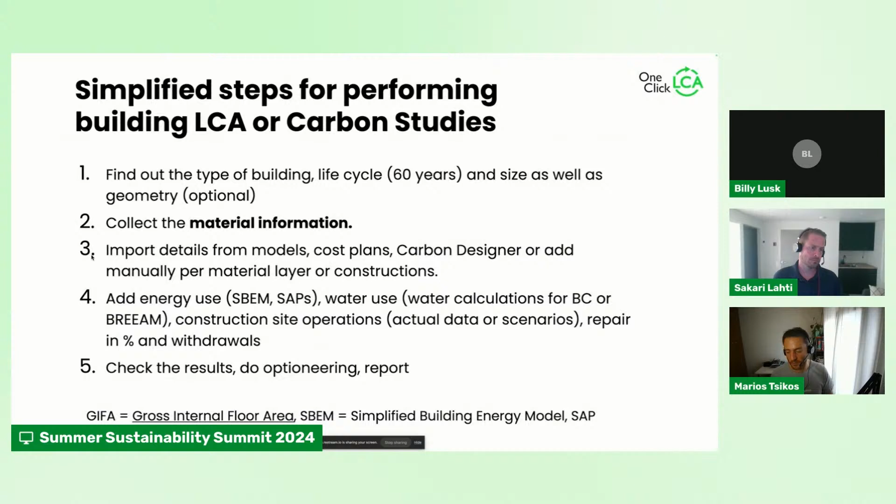And when should someone start this process then? The answer to that question is very simple. It is as soon as possible, because it is at the earliest stages that we've got the higher ability to influence the design. It is at the earliest stages, for example, that we can convince the design team and the client that we need to switch from one structural frame to the other, or we need to change the shape so it is more efficient, or do any other such big change. And as we move on, we leave smaller changes like window types, flooring, and choosing products for later design stages.

Sources of data can be quite many, really, but today we will focus on data sources for structural materials, in which case the One Click LCA integrations with Tekla Structures and Tekla Structural Designer can be very useful. And with that, I will hand it over to Sakari, who will talk a bit about these integrations and how Trimble's tools have been proven very useful for prefabricators as well, who wish to produce EPDs for their products. Sakari, over to you.

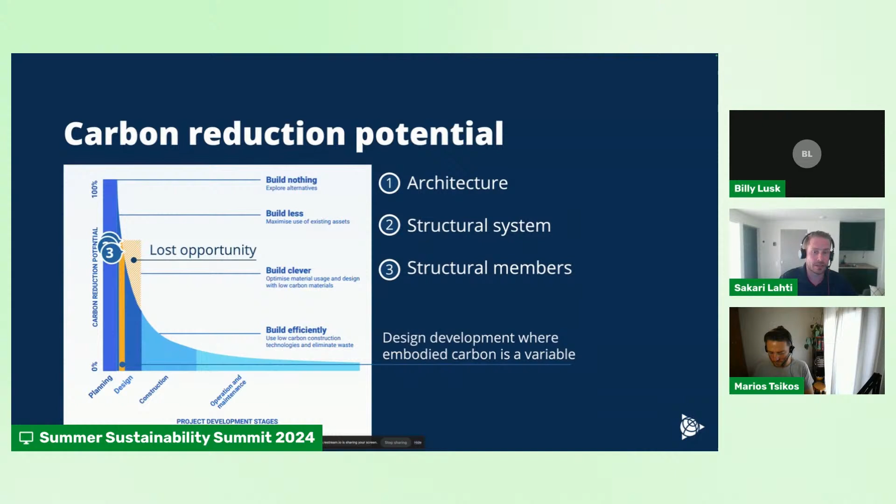The more iterations you can run against different value parameters, the more insights you will have to make better decisions. This type of design development will, of course, need a new transformational attitude from all the stakeholders: owners, contractors, manufacturers, and of course, the entire design team. But when optimizing the entire building-level embodied carbon, the data integration to LCA software needs to be fluent, but also feed the correct data.

And with Trimble, there are three different use cases for how to feed One Click LCA with data. The first option is directly from the structural analysis software, which is called Tekla Structural Designer from Trimble. The second option is from our constructible BIM modeling software, Tekla Structures. And the last option is our project collaboration platform called Trimble Connect. These options provide feasible data transfer regardless of the project setup.

After data is imported to One Click LCA, you can get the building LCA that can be used as a benchmark to reduce the embodied carbon with the project stakeholders by changing the design or the construction materials. So all of that is happening on the building-level optimization.

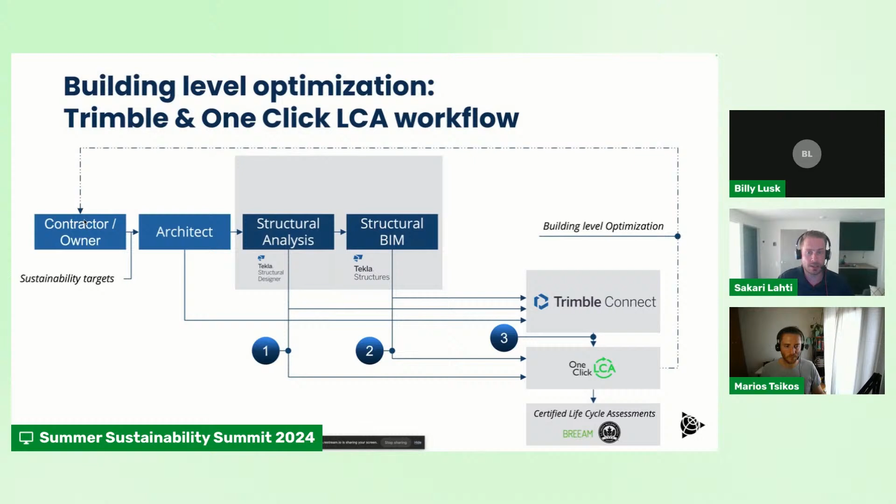But then inside, each designer of the project can optimize their own design within the building optimization. With Trimble, we offer tools for Tekla Structural Designer and Tekla Structures to dynamically see the embodied carbon of individual structures. The user can define or download embodied carbon factors or EPDs used in the calculation. The idea is that the structural engineer would get a basic understanding of their design choices related to material selection and the structural system's impact on the material quantities, and of course the embodied carbon quantities.

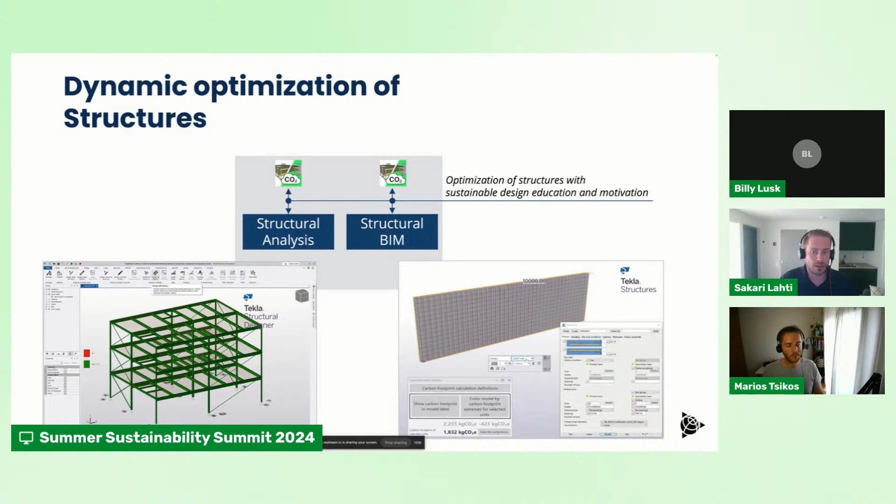You can find more information about these tools on the Tekla website if you want to learn more. There are a few webinars regarding those.

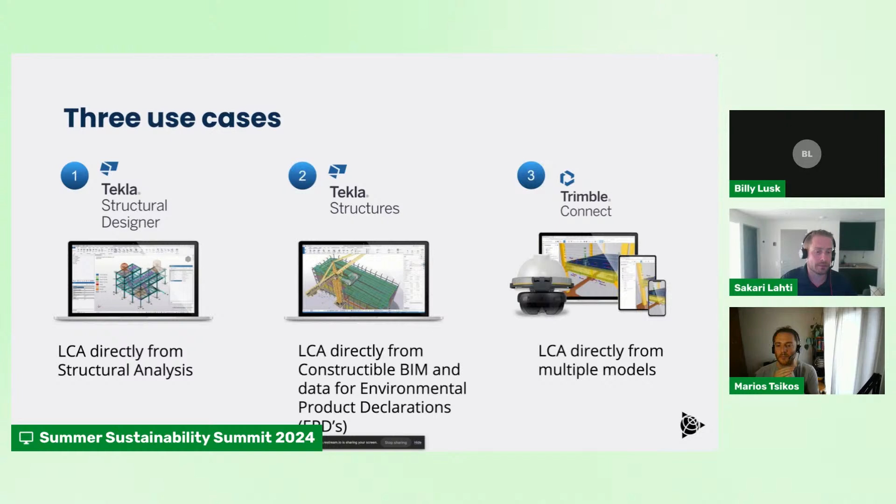But then back to these use cases with One Click LCA. So, three different scenarios. In the first one, a structural engineer uses Tekla Structural Designer for structural analysis and exports the data for the LCA. In the second one, a structural engineer or BIM technician uses Tekla Structures to create a structural BIM model and exports the data to One Click LCA to do the actual life cycle assessment. And the last one is where an LCA expert might use Trimble Connect to gather data from multiple different sources, combining multiple different models, again to send the data to One Click LCA.

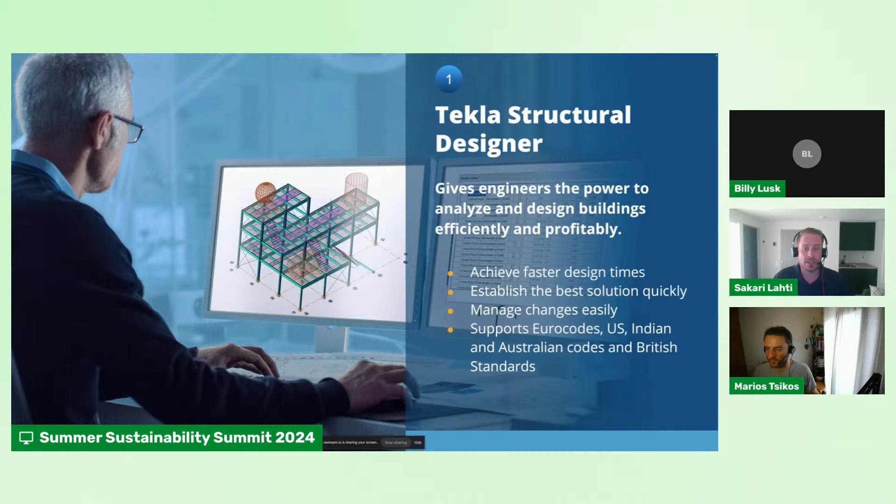So the first use case is with Tekla Structural Designer, the easiest to learn structural analysis and design software for steel, concrete, and timber. It supports Eurocode, US, Indian, Australian, and British standards. In the next slide, you will see how easy it is to submit the structural analysis level material takeoff to One Click LCA. After structural design of the members has been done, you'll find the One Click LCA button on the Integrations tab. It exports the material takeoff to One Click LCA and opens a web browser to continue with the data. Notice at this point, it is possible to send the data to another user.

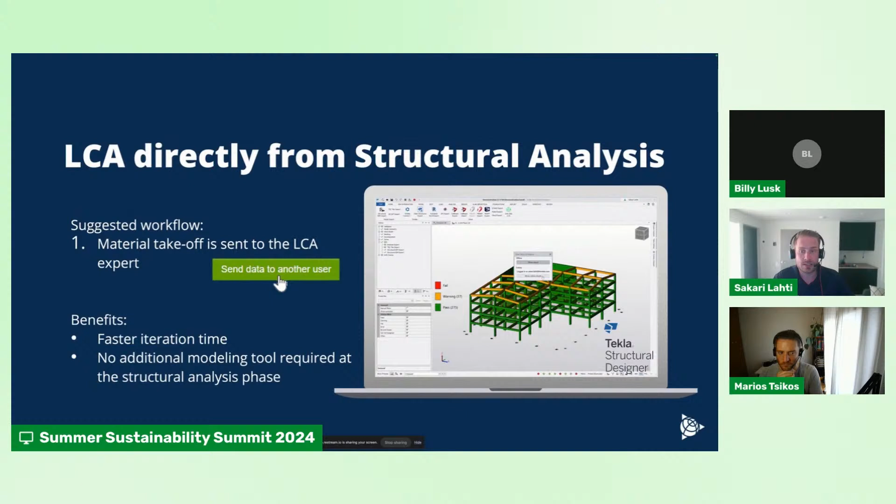So it doesn't need to be the actual structural engineer utilizing One Click LCA; the data can be sent for the assessment done by another user. This speeds up the iteration of building design, as the structural model is utilized before any official documentation is needed.

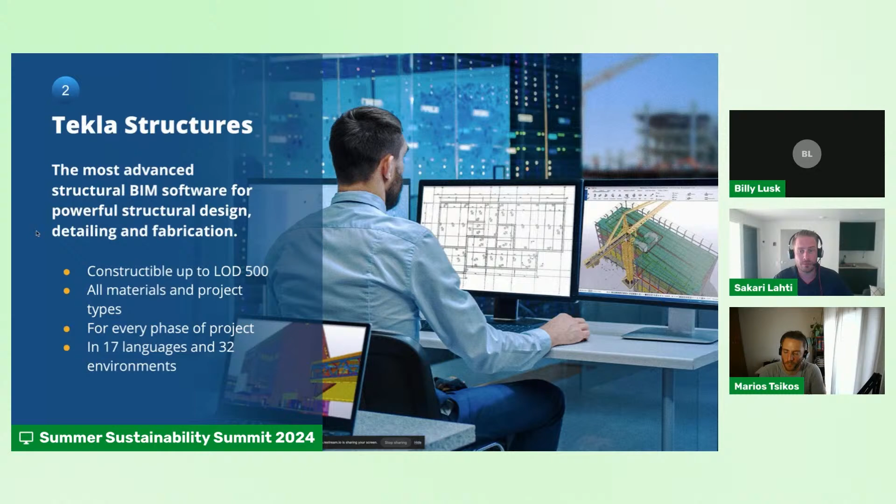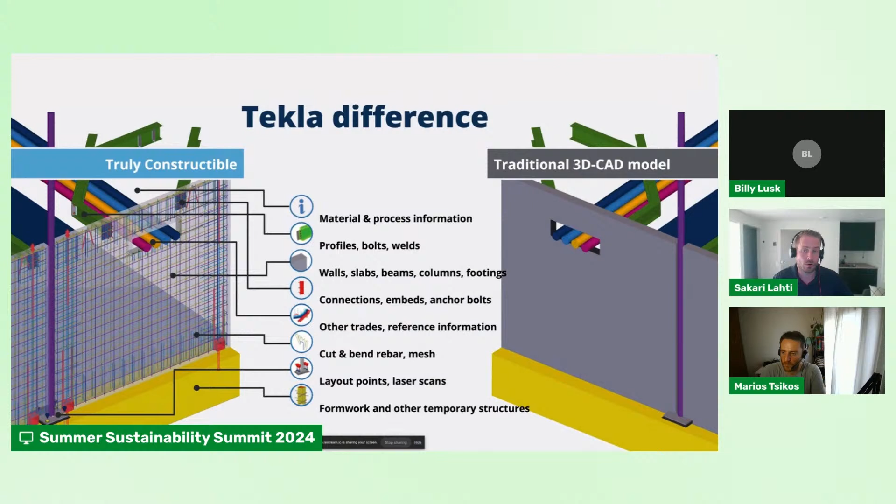Then the second use case is with Tekla Structures. Tekla Structures is a powerful structural BIM software that lets you create, combine, manage, and share multi-material 3D models packed with valuable construction information. You can use Tekla Structures for any project type, any material, throughout the project, from conceptual design to the constructible level of detail. The key difference is that Tekla Structures has been built for constructible BIM modeling. It means that every nut, bolt, weld, connector, or rebar can be easily designed.

Here's one practical example of the difference that is important from the LCA point of view. A Tekla 3D model really represents how the structure will be built. Therefore, the material quantities are always correct, and it does not contain any overlapping materials. In the example structure here, there is a 4% difference in volume of concrete compared to alternative BIM software. Inaccuracies in the data input for the LCA can distort the results, leading to bad decisions or time wasted in LCA software fixing the input quantities. A Tekla model can offer geometry accuracy, correct material data, object hierarchy, and data reliability for the LCA and EPD definitions.

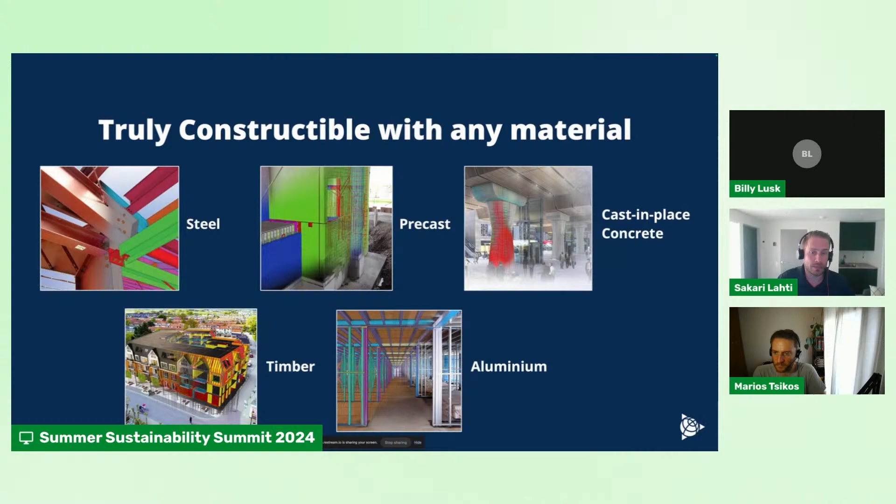And no matter what material you're working with, we're actually talking about truly constructible models. At Tekla, we have focused on steel, cast in place, and precast concrete. However, our customers have taken the Tekla platform and created their own tools, for instance, for aluminum curtain walls, light metal framing, and timber structures, etc. And they have selected Tekla because it's the only platform that can perform with fully detailed structures.

So it is the tool to get the most accurate material takeoff. And for all building component manufacturers, it means accurate data to understand all parts and pieces that are needed to prefabricate those components. In EPD definition, you're trying to figure out the average consumption of materials for building components per kilogram of material or square meter of area. If you use Tekla to create constructible BIM models, you will have that information.

You are able to get the average amount of welding in a steel truss product per kilogram, able to get the average amount of certain embeds or reinforcement in a certain precast wall panel per product kilogram. And the following slide shows the integration from Tekla Structures to One Click LCA.

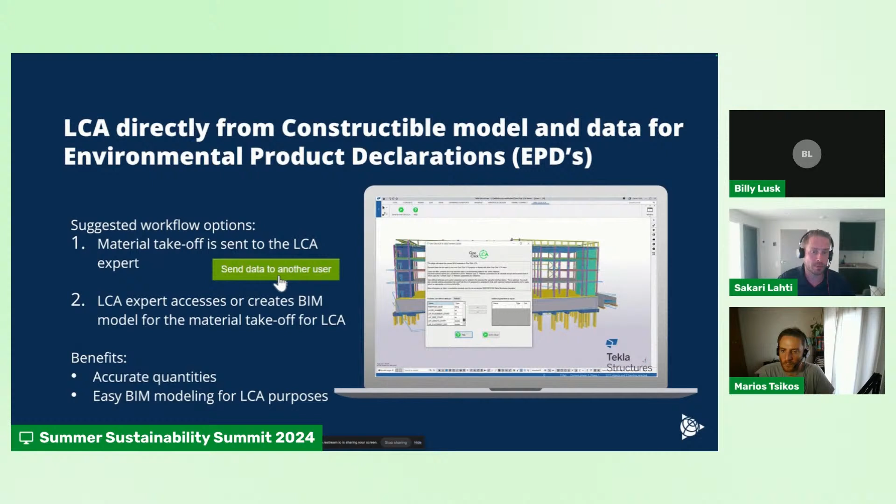So to get the data for LCA from Tekla Structures, there are two workflow options. The first one being the same as with the Tekla Structural Designer. Information can be sent to an LCA expert via the send to another user feature. The other option is that the LCA expert accesses or creates the BIM model for LCA purposes. Modeling tools in Tekla are very easy for anyone to create BIM models, especially for LCA purposes.

The third use case is around Trimble Connect, which is an intuitive collaboration platform for construction projects. Trimble Connect is a cloud-based platform that connects the right people to the right constructible data at the right time. It provides up to the minute construction-ready project information. View, review, and reference BIM models, drawings, and other data you'll need for a successful construction project.

This gives the freedom for the LCA expert to collect the models regardless of the design software that can export open BIM IFC format. Having a 3D viewer tool in the LCA process helps the LCA expert to understand the design better when assessing the carbon impacts. So that was a brief introduction to the tools and the integrations from Trimble to help in your LCA and EPD workflows and to reach your sustainability targets.